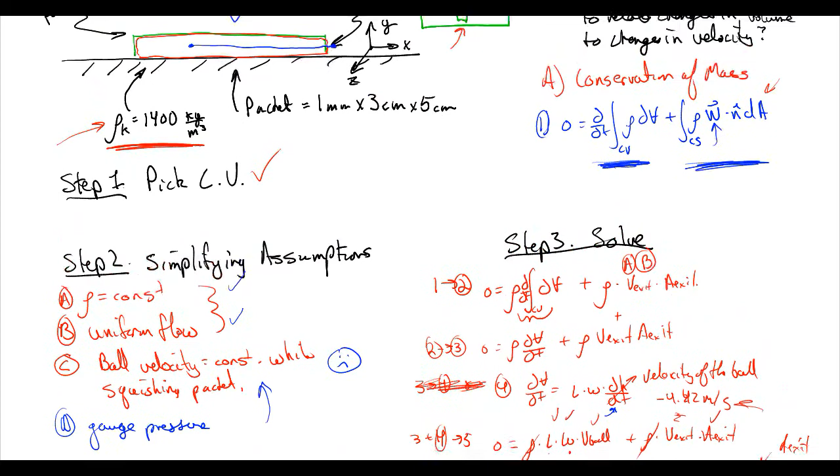Okay, so this is going to be somewhat of a bonus lecture. We found out in our last lecture that our model for modeling the velocity that ketchup leaves a ketchup packet was terrible. The ketchup was going to leave at a velocity approaching that of the escape velocity of the Earth. It was 6.63 times 10 to the third meters per second, which at the very least is far beyond the speed of sound. So you would get a mini sonic boom for the ketchup leaving your ketchup packet, which is incredibly fast.

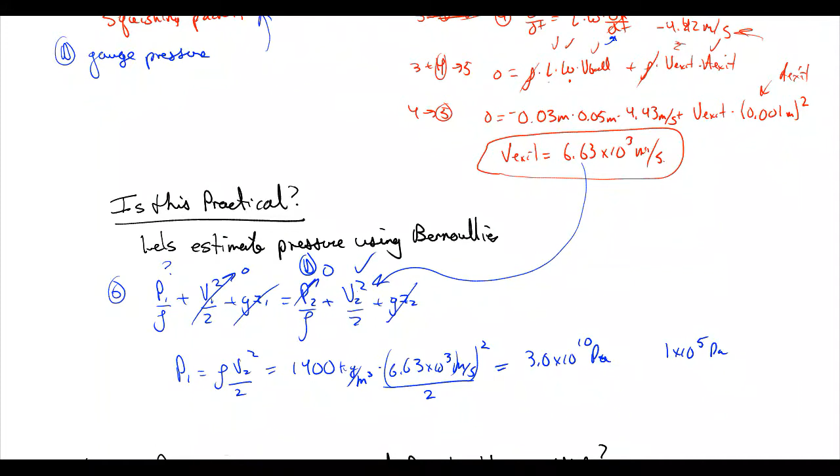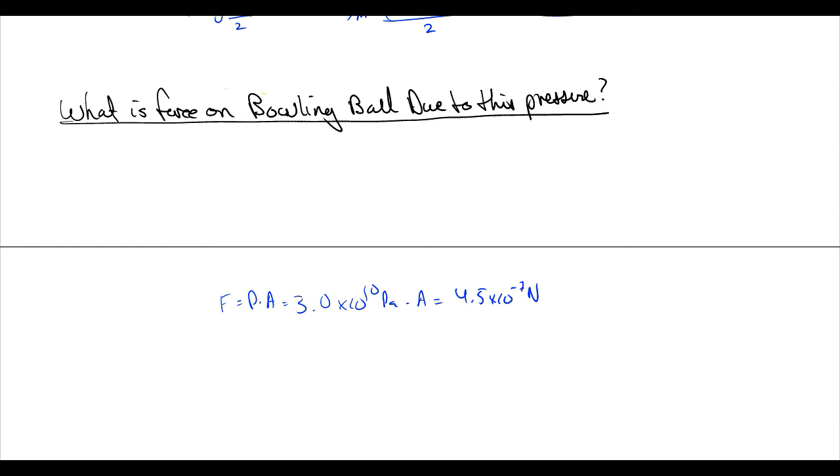And the reason our ketchup packet model was bad was because we assumed that our ball velocity was constant while squishing the packet. It turns out this is a bad assumption because our pressure inside of the packet reached 3 times 10 to the 10th pascals, which is a truly ginormous pressure. Our force, remember, is equal to our pressure times our area, which is 3.0 times 10 to the 10th pascals times our area, equal to 4.5 times 10 to the 7th newtons, which is a truly gigantic force, right? And it's unreasonable to believe that our bowling ball, however heavy it is, is not going to accelerate in response to that force. So let's relax that assumption of our model.

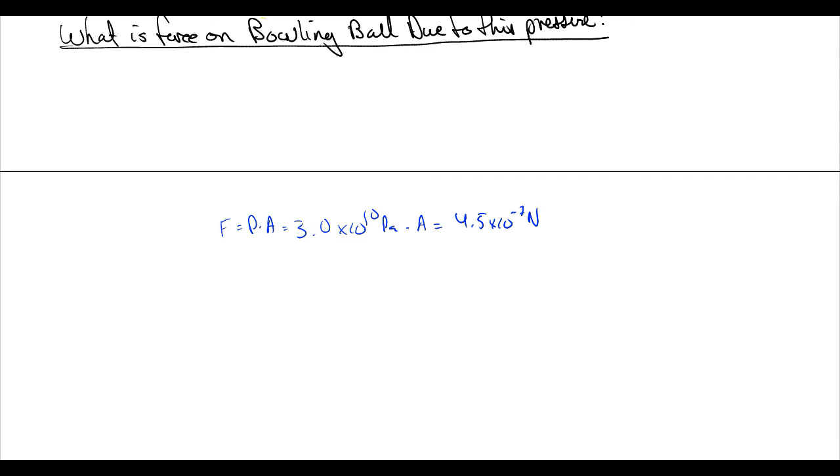So let's assume that our velocity is not constant for our bowling ball. If we do that, we need more equations in order to constrain our system, right? Because now we have an additional unknown, which is the velocity of the ball. So one thing we can do is solve for the velocity of the ketchup exiting the packet in terms of the velocity of the ball, which is going to be V exit is equal to V ball times length times width divided by A exit, all of this squared. And then we can plug this into our pressure equation.

But then what are we going to do with our pressure equation? Well, we know now that we have a dynamic system. We have changing velocities, accelerating velocities. And the second you think that something is accelerating due to forces, you should apply Newton's law. Sum of the forces is equal to mass times acceleration, right? So in this case, the sum of our forces is going to be equal to our pressure times our area, which is equal to mass times V ball times dV ball dx.

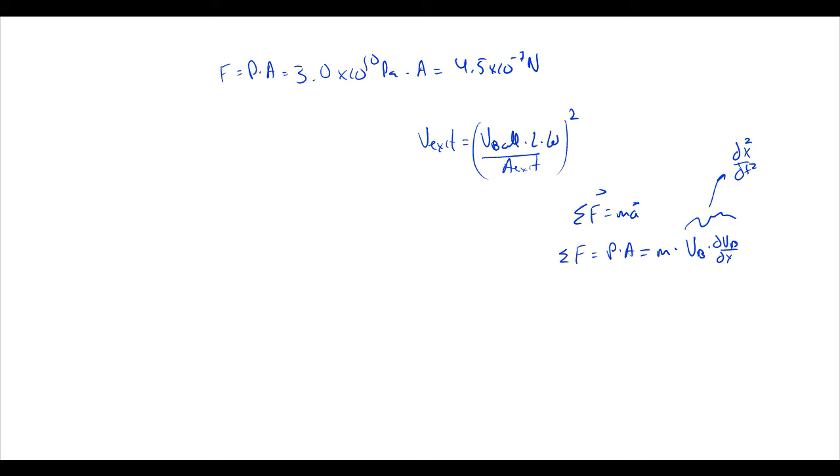And I'm using this formulation of acceleration as opposed to the one you're used to, which is d squared x dt squared, because it makes the math easier to solve, period, right? So the result we're going to get requires a little bit more mental effort to interpret, but that's not a big deal. As you'll see, it actually gives really pretty stark results. But like I said, because we've substituted in a first order differential equation as opposed to a second order differential equation, it makes it a lot easier to solve.

Okay, so if we have P times A is equal to mass times VB times dVB dx, we can substitute our pressure, which we have here in terms of V exit. Oops, right here. This is V exit right here. For our pressure, and this is a packet. This is the 3 centimeters by 5 centimeters area that the ball is in contact with the packet. So this is going to be equal to rho times V ball times length times width all over A exit, squared, times length times width. Remember, that comes from here where we rewrote the V exit in terms of V ball.

And that's going to be equal to our mass, which is the mass of our ball, times the velocity of our ball, times dV ball dx. So this is assuming that the ketchup packet doesn't explode. So again, we're making an assumption. We've got to state these assumptions.

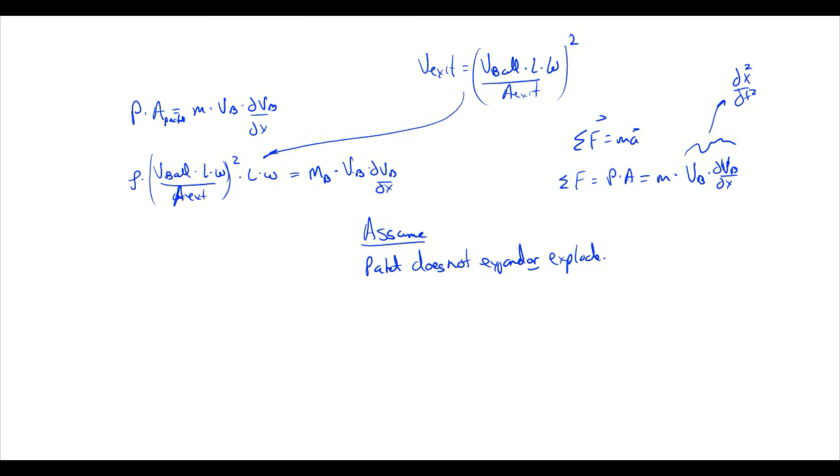This assumes that the packet does not expand or explode. Okay, so assuming that's true, like we have a Kevlar ketchup packet because, I don't know, we're super rich. We can solve this differential equation because we have v ball squared on the left, v on the right, dv dx. We can easily solve this differential equation. So let's do that.

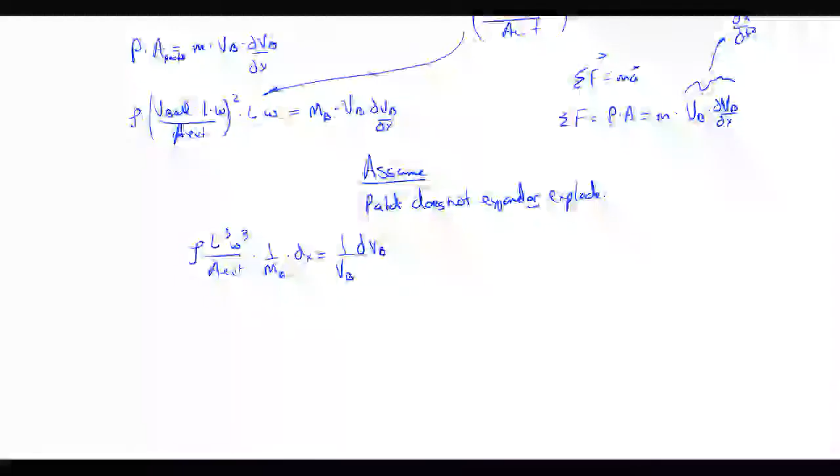We have rho L cubed W cubed over A exit times 1 over mass of our ball times dx is equal to 1 over velocity of our ball, dv ball. And you've done this integral many times. This is equal to, when we integrate it, c times e to the,

natural log of v ball is equal to rho L cubed W cubed over A exit times 1 over MB times x plus c, which when we raise to the power, we get that v ball is equal to c times e to the rho L cubed W cubed over A exit times 1 over M ball times x.

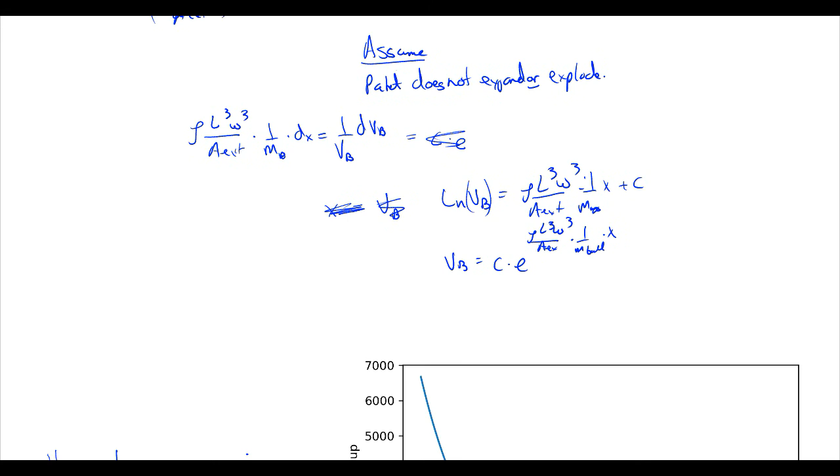And we can solve for this c, and we find out that c is just equal to the initial velocity of the ball. So v ball is equal to negative 4.47 meters per second times e to the rho L cubed W cubed over A exit times 1 over M ball times x.

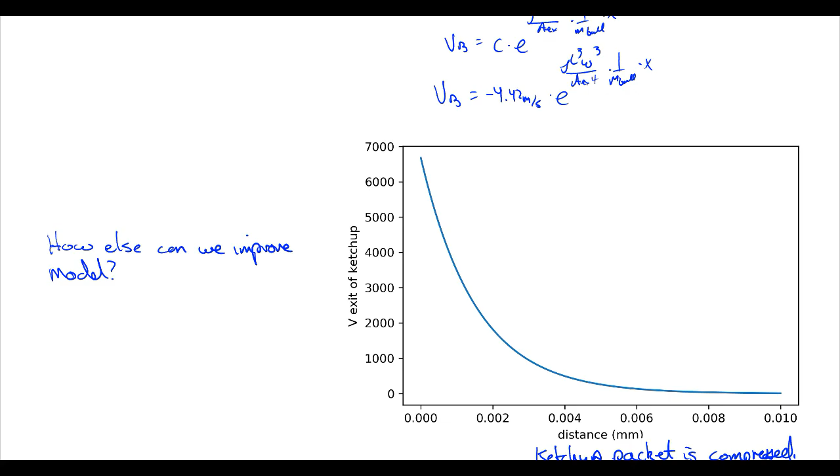And what's really interesting is this allows us to solve for the exit velocity of the ketchup in terms of the velocity of the ball. Because remember, we can easily exchange between the velocity of the ball and the velocity of the ketchup. And so I've done that here. So we can see that the exit velocity of the ketchup, when the ball initially hits the ketchup packet, is approximately 7,000 meters per second. Outrageously high, right?

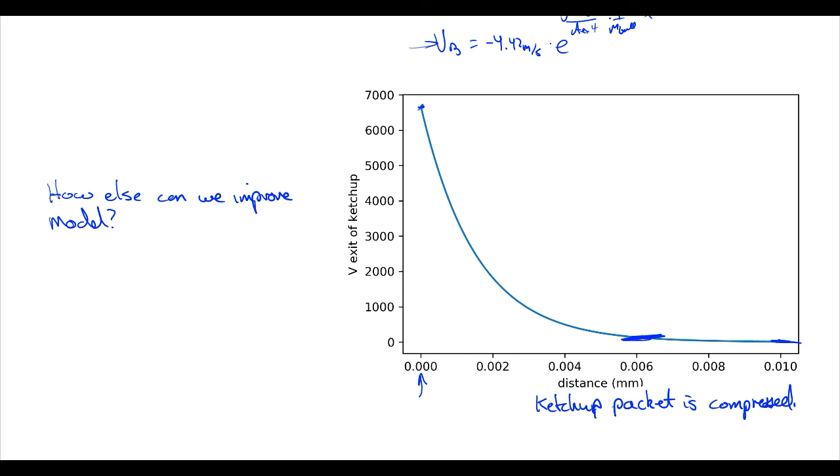But then before the ball even compresses the ketchup packet more than 6 microns, the velocity of the ball has fallen quite low. And by the time we hit 10 microns, the velocity of the ball is basically zero on this plot, right? So it's probably a few meters per second, but not anything significant. And 10 microns is very small. The width of your hair is 100 microns. The width of a blood cell is 5 to 10 microns.

So before the ketchup packet has moved the width of a cell in your body, it has slowed down tremendously, right? And the exit velocity of the ketchup has slowed down to on the order of probably meters per second, right? Which is why when you see ketchup packets that people have stomped on, the ketchup goes a couple meters maybe, but not much more than that because the ketchup velocity actually isn't that high.

It's very high at the beginning, and so the question is why do we not hear a sonic boom when we first step on a ketchup packet? And the reason is because our model still isn't that great. We can improve our model more by including gravity. We could include the bursting of the packet. Assume that the material has some sort of yield strength and solve for the stress in the actual packet material and whether or not it'll burst.

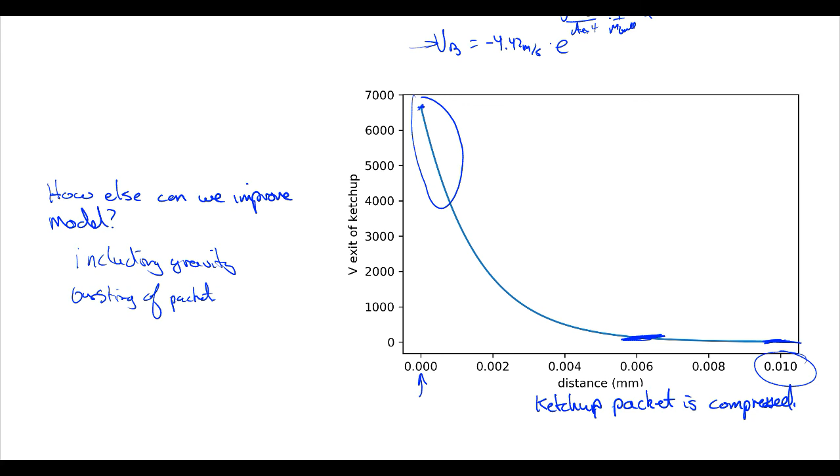We can also include elastic deformation of the packet, which means our volume would change in a very complicated way with time. But what it would do is it would allow a smoother transition to a slower velocity for the ball and a much lower initial velocity of our ketchup packet, because instead of the ketchup exiting at multiples of the speed of sound, like an order of magnitude greater than the speed of sound, the ketchup will start exiting at a normal velocity, but the ketchup packet itself will deform and expand in order to accommodate that increase in pressure.

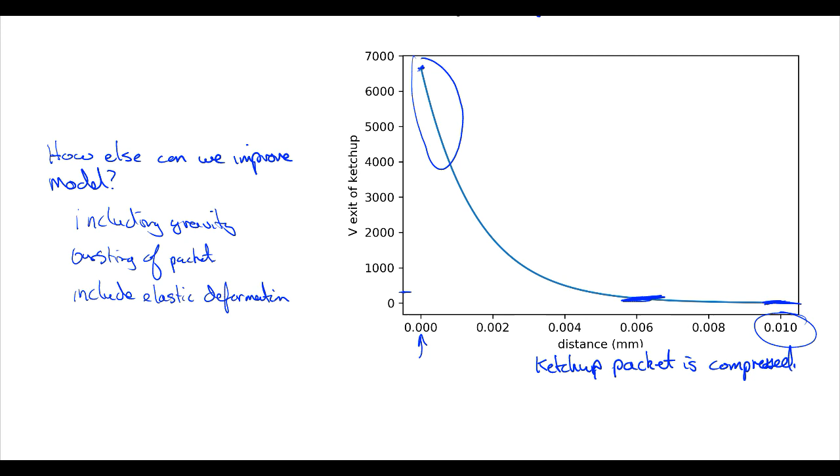That pressure energy, in other words, is not going to be converted 100% into exit velocity of the ketchup. It's going to be converted into expanding the ketchup packet itself. So there's lots of ways we can improve this model, and we could keep doing this for weeks until we can accurately model the velocity that ketchup exits a ketchup packet. But hopefully this gives you an idea of how you might start with an easy, simple model and slowly increase the complexity.